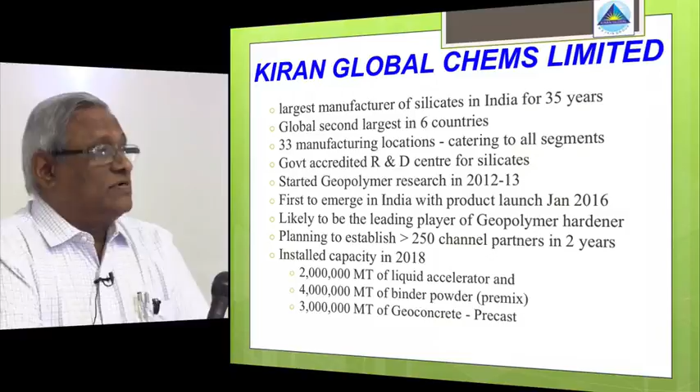We would like to establish more than 250 channel partners who will be working with us on the geopolymer products in the next 2 years. We would also like to establish a 2 million ton capacity of liquid accelerator, with 4 million tons of binder powder, and about 3 million tons of precast geoconcrete in the next 2 years.

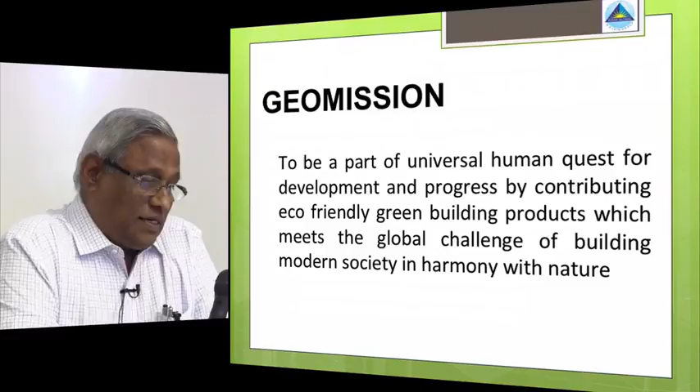This is part of our Geomission, where we would like to have earth-friendly materials to build green building products, and we would like to be present globally.

A brief about the manufacturing of silicate. There are 2 processes, which the gentleman from Walden told you yesterday: we do both fusion and dissolving process, and also the direct hydrothermal process. In the fusion process, we use sodium carbonate and silica sand, and in the hydrothermal process we use sodium hydroxide and quartz.

We are also making a lot of blended grades of silicates for accelerators, and currently a new product we have evolved is an accelerator using feldspar. I've got some samples which I'll show you later.

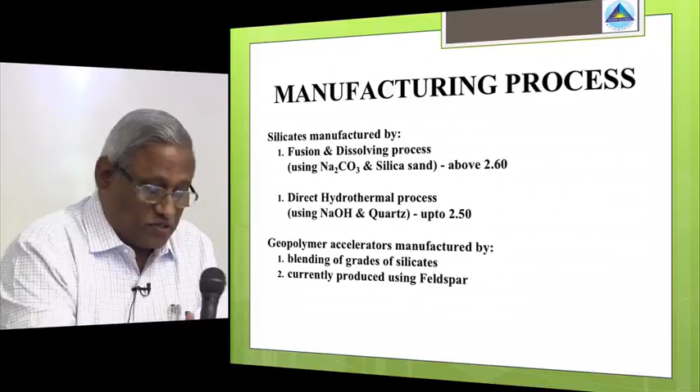As I told you, between the last conference and now, I'm going to share 12 months of my experience in the areas of accelerator development, application of geopolymer in different areas, and our observations and recommendations. I think this will be very useful to most of you here.

As part of the presentation, we have the milestones from last year and the facilities we created to cater to the market, our future roadmap, the business plan, and what this channel partners program is all about. I think this is an innovative idea which we want to take up much faster into the world.

I'll give you some recommendations which I think will be useful to most of us, and how we would like to be present globally. What are the milestones? In September of last year, we installed an exclusive accelerator facility to manufacture Geopolymer accelerator.

Between September and now, we have 33 plants making sodium silicate, but we have one exclusive facility for making accelerator. We have set up 3 more plants in the last 7 months.

Last December, Chennai and Tamil Nadu experienced one of the worst floods in the last 80 years. So what we did in the city of Chennai is take a vehicle with our geopolymer concrete and went all over the streets filling up potholes as our part of supporting the government.

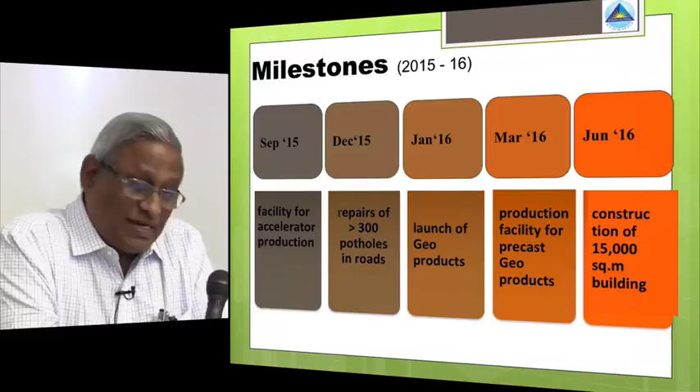It was a 15,000 square meter building, our own factory constructed for manufacturing precipitated silica. We didn't do the structural elements, which were done earlier. All non-structural elements, the roads and everything, were done using geopolymer, and I think it was a very great experience for us.

These are some of the projects we have been executing, and we have already executed more than 65,000 square meters of geopolymer paver blocks.

The first one we started is a quarters for our laborers to stay on a 1,200 square meter area, and this is how we started our first work.

As I told you earlier, the 20,000 square meter precipitated silica factory has an underground water storage tank of 1 million liters, and we constructed the effluent treatment plant and a chimney 16 meters tall, all from geopolymer concrete, with all non-structural elements, as the structural elements were finished earlier. I was going to show the photograph also.

Another one is we have made the coastal armor, the tetrapods. We made samples and got them approved, and we are going to execute a big project in the Maldives, supplying about 6,000 tons of geopolymer precast tetrapods every month.

At present, we are constructing a cottage, a villa, for a group of companies, about 60 cottages all in precast concrete, running to about 85,000 square feet, or roughly 9,000 square meters, and some photographs.

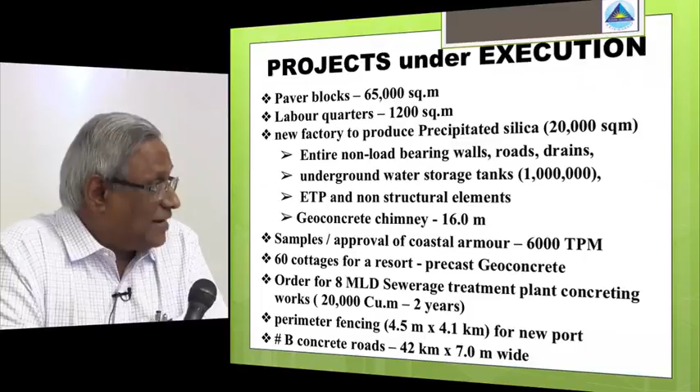The government of Telangana, the new state formed from Andhra Pradesh, now requires all B-class roads to be laid in concrete. So we got hold of the ministry, laid a sample, and now we have got the first contract for laying 42 kilometers of B-class roads, 7 meters wide.

This is the factory building of ours, which will be producing precipitated silica from the first week of September, about 50 tons per day. This is nearing completion.

Other than all the structural members, it's a 20-meter tall structure, and all walls, the roads, and the flooring are all done by geopolymer concrete.

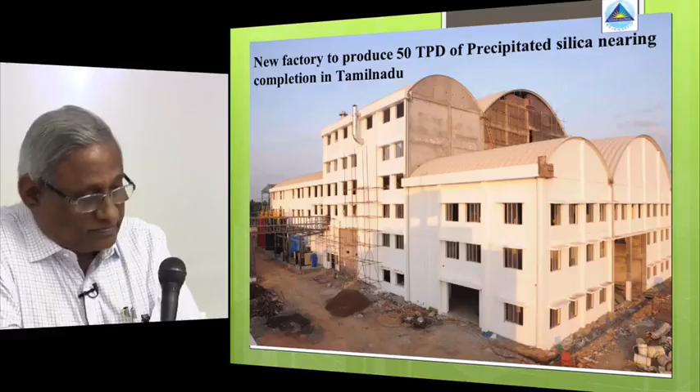You see, these are the top chimney blocks that we have made in Geopolymer concrete, and the total chimney was about 16 meters. We got a lot of chimney elements made now of different sizes. We made chimneys of 1.25 meters in diameter.

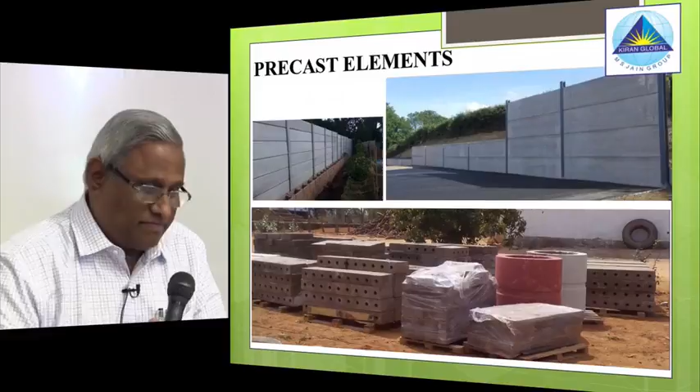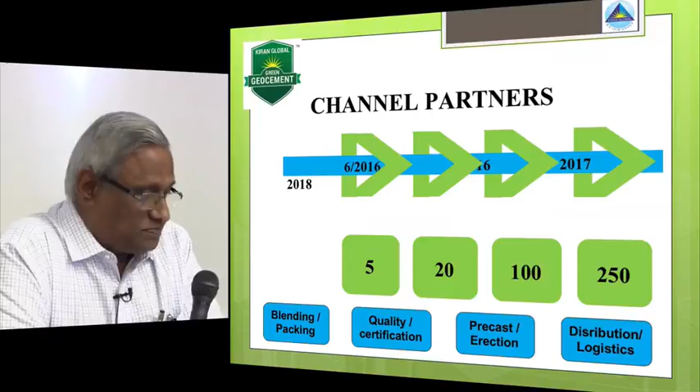We are creating an exclusive facility in a port, and almost 70% of the work is over. The construction and erection is going on. Maybe from the month of September or October, we'll start production in that unit, which will supply this to the government of Maldives. The contract is for about 5 years.

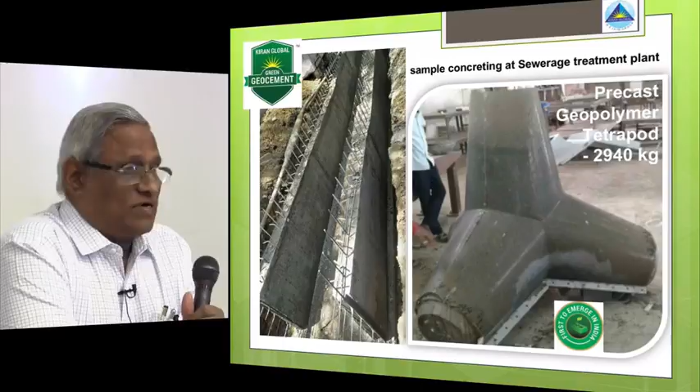We need to cast a total of about 3,000 rafters for this project, and this is a very prestigious product. Even the companies making Portland cement precast have failed at this.

We have a 5-inch section and a 2.5-inch section. The Portland cement could not withstand it, and of course we took a lot of trials. The important part of this is that the whole design of the molds was done by us.

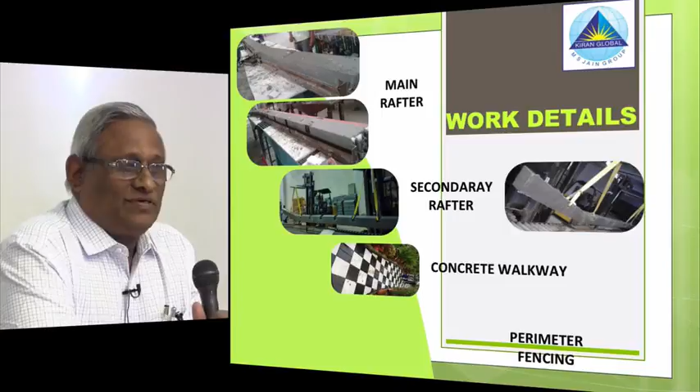It's a walkway, a sample walkway we created using geopolymer concrete. I'm showing this because it has two colors—black and white—which are the toughest colors to make in concrete. You can make any color, but black and white are the most difficult, and we did it with fair amount of success using geopolymer concrete.

This is a small 20-meter sample we made, and we need a lot of walkways for this project. The architect wanted black and white, and it was a challenge that we addressed.

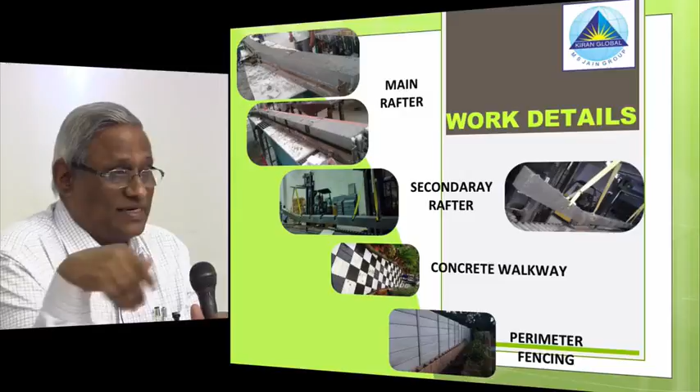This was another type of fencing for the project, with a lot of planter boxes where you can create greenery. The cottages have a built-in big lake, a golf course, and a lot of facilities—it's quite a big cottage project.

I'm just sharing some of these things, and as I told you, we have our own well-equipped mold making workshop, which is essential if you want to do precast materials.

We have made molds from PVC and rubber for small components, which we outsource. We give a master mold and get it outsourced from the market, while we develop our own steel molds.

These steel molds are ceramic coated. We also did a Teflon coating, which works very well, but we are not able to recycle it for a long time. We also tried an epoxy coating, which also worked well, but again had the problem of recycling. The ceramic coating lasts longer, so we established a ceramic coating setup.

We have an excellent ceramic coating setup because we need to do a lot of molds. It's a plasma coating. All our products are set and cured at ambient temperature—we have not done any increased curing at all.

We have a plant for manufacturing pre-mixed powder binders at various mixed ratios of fly ash and GGBS. The issue is two things: if there are more fines, it consumes more accelerator, and if there is more moisture, it becomes very difficult to control. These are the two things we need to address when pre-packing the powders.

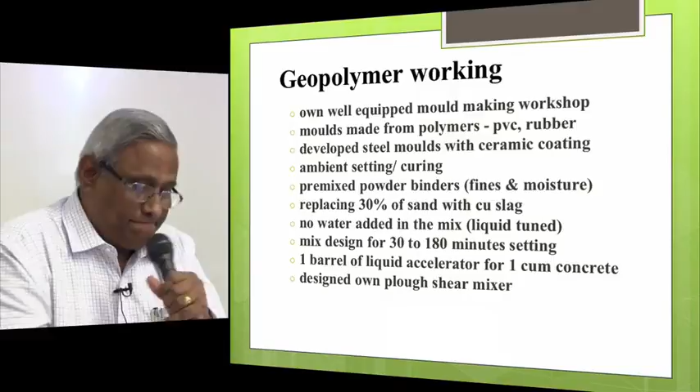In our plants that we would like to establish - 2 plants already commissioned, as I already told you - each has a capacity of 50,000 tons per annum, roughly about 150 tons a day, with an investment of 200 million Indian rupees. These plants grind the blast furnace slag, blend it, and also do the packing.

We are not ready for packing this material as a product for the market because of issues with the cement lobby. So we are now giving it to our channel partners instead.

For the accelerator, we have commissioned 3 plants, and now we have a capacity of 20,000 tons per annum. This is excluding our silicate plant.

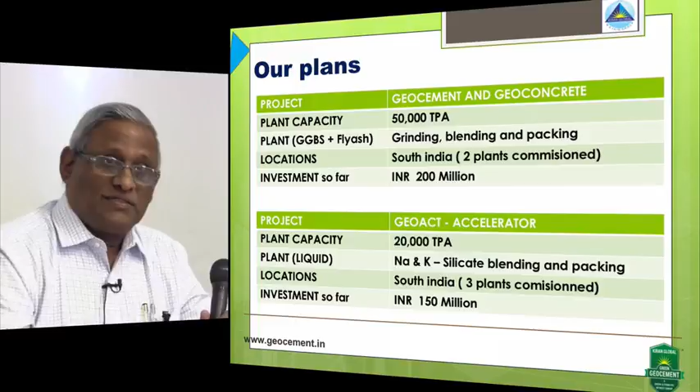The silicate has got nothing to do with this - it's totally an accelerator where we have a blending facility and an exclusive manufacturing facility for making both sodium and potassium. We also have a packing facility where we can pack it in jerry cans or in barrels.

This is the second largest steel plant in India, called the Vizag Steel Plant. In the last 5 months since our launch, they are after us and we are after them.

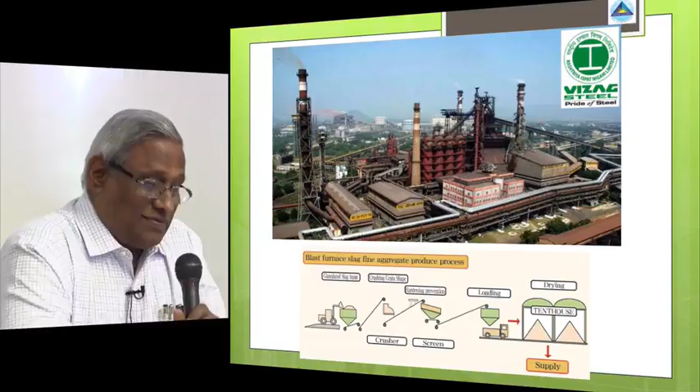On the 28th of June, about 10 days before, we got a raw material linkage proposal - they've given us 15,000 tons per month of fly ash and 15,000 tons of blast furnace slag, and we are going to create a grinding facility inside the steel plant. They are giving us an exclusive place so we save on taxes for transportation.

We will be setting up our first 400,000 tons binder plant in Vizag in exactly 4 months from now. This is the first government support that we got - it's a government-owned steel plant. Now we have more offers coming from other companies, and this is one we got very recently.

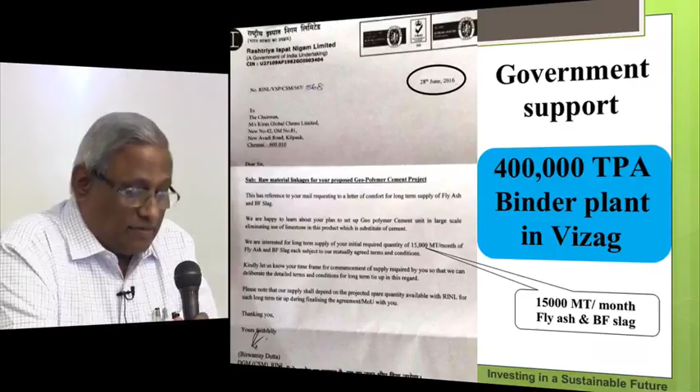These are the products we have on our shelf, ready from our research. One is Geocement, a powder blend, and the other is the Accelerator, which is liquid. Then we have Geocrete normal, for general purpose concrete, and Geocrete super, which is a quick setting material.

Then we have one for wear resistance, called Tough, and Mortar, which has worked very well - we have trained over 30 masons to work with it, and they have in turn trained about another 100 people. It's a very big achievement using this Geopolymer mortar.

Our compound for fixing tiles has come out very well - we have a mortar joint of just 2 to 2.5 millimeter thickness. I'm going to tell you a case study a little later about what we did.

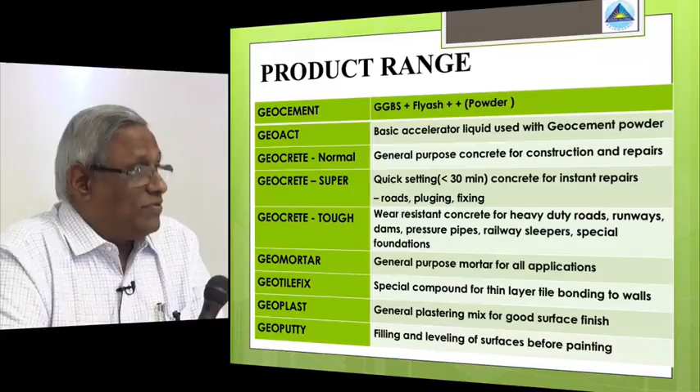We also have a plaster mortar, which gives a very good finish and works with your plastering machine too. Then we have a putty, which is used to fill up gaps and so on. So for the Geocement range, we want to have about 9 types of cements.

This is how we take competition with the Portland cement. The first one is the general purpose cement, which we would even prefer to undersell to compete with cement, and which in actual case it is not required, but it is possible.

A general purpose cement, and then we have an acid resistant grade where we use a mixture of sodium potassium, and then we have a temperature resistant cement where we use mostly potassium, and we have a chloride resistant cement, and then we have a ready mix concrete.

And how to make ready mix concrete and setting time, I'm going to tell you how we have done it very successfully. And then quick setting, we have made a lightweight block that floats in water, and we did a good project doing a panel. It's come out well.

Right now we are working on insulation material. We are doing insulating roof tiles with a channel partner who is an existing factory, where we have asked him to use Geopolymer in place of Portland cement, and he has successfully done it. It took a lot of trials, and it was not so easy. We had to fine tune, and correct some of the molds, and it has come out very well. He has just gone into production. Probably we will go into the market from next month onwards.

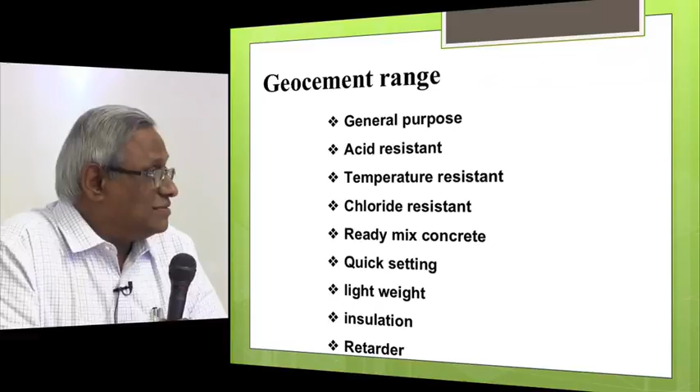And we have made some retarders. These are required for making the ready-mix concrete. These are other products we are now developing in our R&D.

We are having a waterproofing compound. We have a primer coat for all masonry surfaces. And then we have a heat resistant coating compound based on geopolymer. There are 3 doctors who are working full time on this, and we have a full-fledged laboratory to do this.

And then we have an acid-proof application which is just completed, and a chloride-resistant cement which is required for marine tetrapods and for the pipelines.

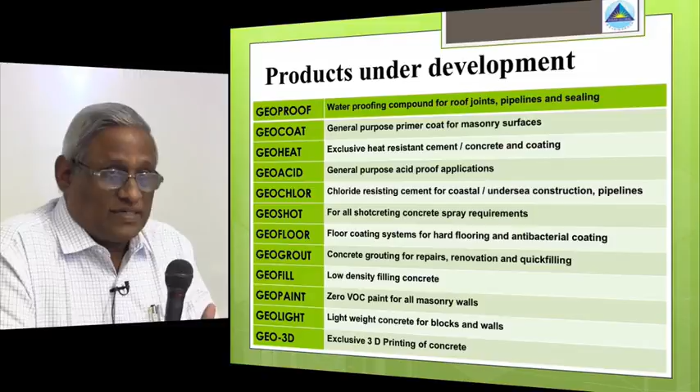For shotcreting, we are just making some trials. The first trials are good. Maybe we need to do more work on this, because basically we are a company that manufactures silicate grouts for underground tunnels. We have a silicate grout which is a backfill for your tunnel segments, and when you do the tunnel boring, this has to set in 20 seconds. So this is the material by which we started our work, and I think that's the starting point for us to get into the geocement business.

The geofill is a low density filling concrete for sunken areas, and then we are coming out with a silicate based paint which is prevalent in Europe and US but not in India, and lightweight concrete as I told you, and 3D printing.

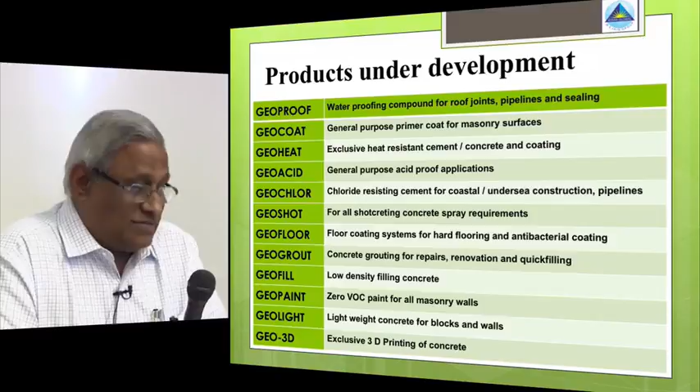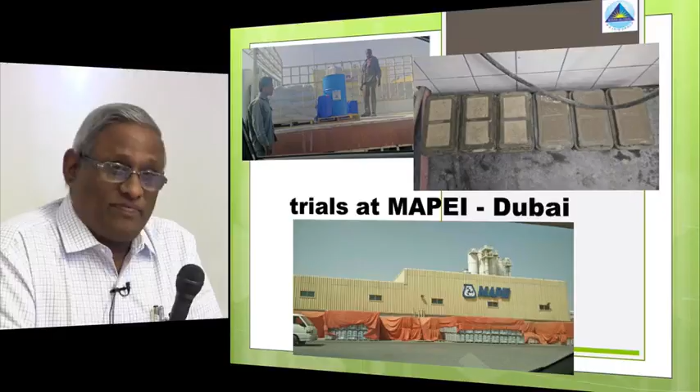So these are some trials that we conducted in Dubai. MAPEI, the leading company who manufactures a lot of additives, was willing to work with us, and we did a trial, and they found the geopolymer concrete. He said it's awesome, something great, I think. And they want to know how to package this, because if they sell geopolymer, their additive business will go down. So they need to find something in between. I think we are working out a methodology by which this product will be packaged.

Some case studies, I will tell you about 2 of them. I'll take case study number 2, where after the floods there was a house that was underwater for about 3/4 of a feet, about 9 inches. After the floods started receding, we filled up the house with sand and geopolymer powder, dry mix, for about 2 feet. We thought we'd need a big compactor, but it just got compacted very easily, and 2 feet we filled up.

We compromised on our ceiling height. The present ceiling height was about 10 feet; we compromised and took it to 8 feet, which is relevant in most countries. 2 feet of filling up was done, then we laid the geopolymer concrete flooring, about 3 inches of flooring.

This time we used none of our factory people or trained masons. We took regular market workers with the regular concrete mixer in the regular way, without telling them it was anything different. So when they started concreting, they first asked, 'Where are the cement bags?' When we started from the barrel instead, they refused.

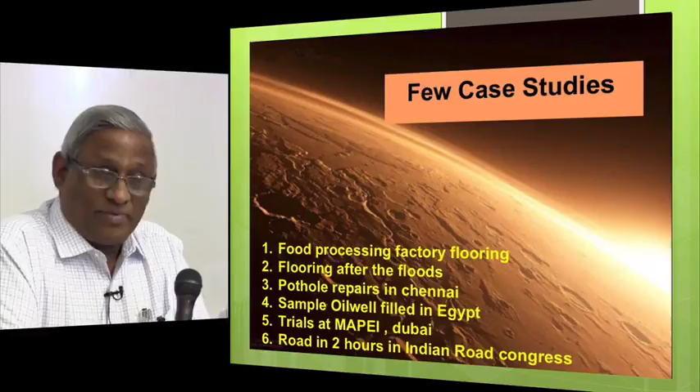They were not able to arrest it because the gas was coming out at 200 degrees centigrade, so it was very difficult. From the Egypt factory, we asked them to formulate our Geocement, and then we took it and a sample well was plugged and sealed very well.

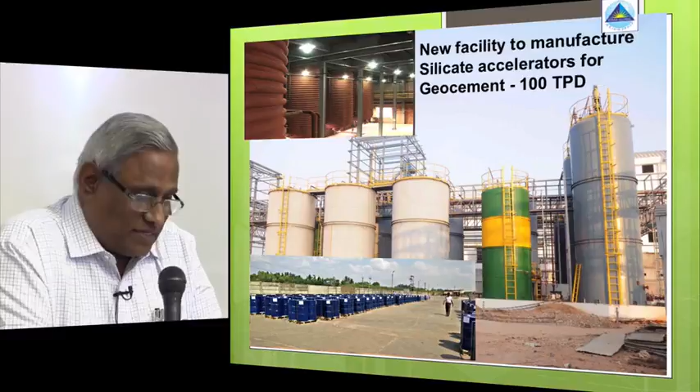Now let me give you some observations and recommendations. The important thing is choosing the right type of accelerator for the right job - this is very important, and I'll tell you how to choose the accelerator in the next slide. Equally important is the ratio of the powder mix of your fly ash and GGBS. Then your mix design depends mostly on the setting time and your strength requirements.

Cracks will come - cracks are not uncommon to concrete, but how you address them is more important. Sometimes you have more fines and it develops cracks, and if it is under-cured - I know there is no traditional curing, but there is still a curing process for geopolymer concrete, it cures within - if you demold it too early, it develops cracks.

Another important problem is efflorescence. It happens when you use a higher alkali content. You get white spots or other deposits coming out, and you'll notice this when you put the product in water - you measure the pH to know how much additional alkali your product has consumed. Actually, it is possible to optimize and work with a very low amount of silicate activator. When I first attended the conference in 2013, they said they used to have 22% alkali; now we work with 5%. There are also dark spots in concrete.

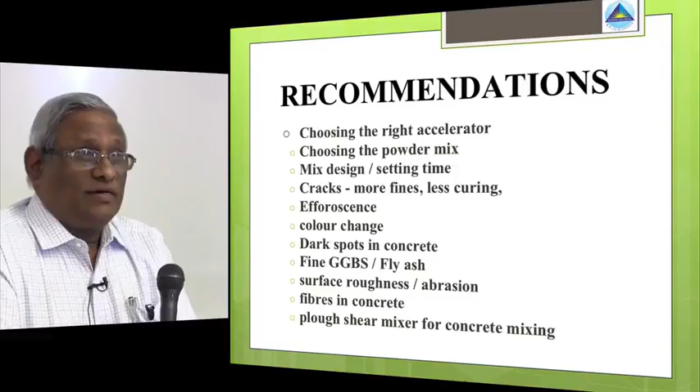And of course, fibers in concrete - I think the best fibers are steel fibers. We have not been successful with glass fibers. We've had some success with polyester fibers, and polypropylene fibers haven't given very good results either. But steel fibers have given very good results for us. Maybe the reason is that the alkali binds it very strongly with the steel. Regarding the shear mixer I already told you about - if you want to build one or order one, ask me, and I will give you a design free of cost.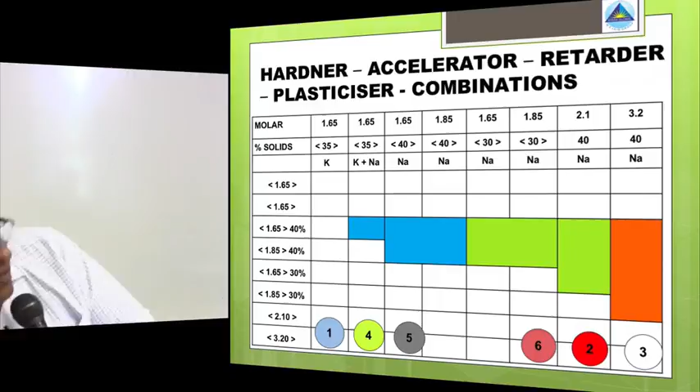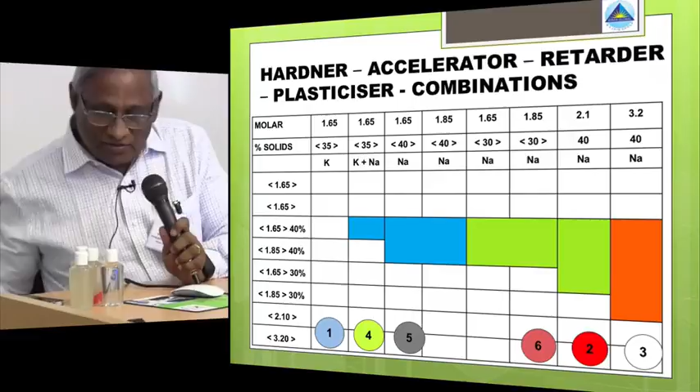This is something very important - the type of accelerators and retarders we've made, using different molar ratios. I have samples here which I'm going to show you, made from molar ratios of 1.65 to 3.2. Many people will wonder what the 3.2 will do, because the recommended ratios are 1.65 to 2.1.

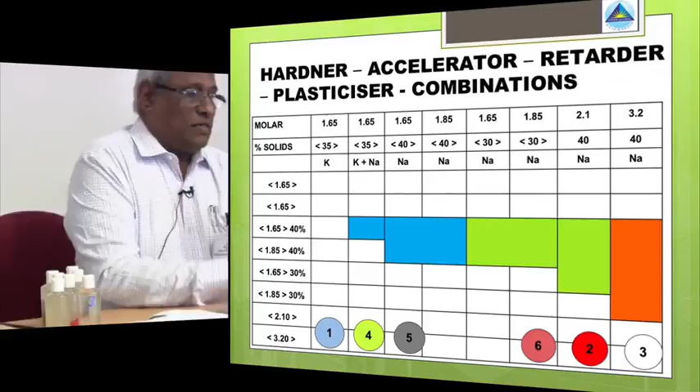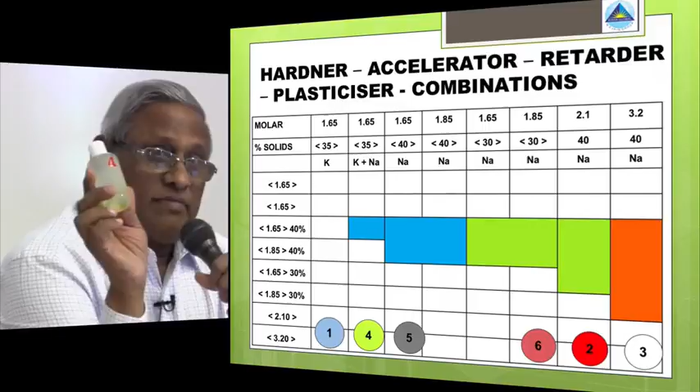The one I have here is the 1.65 ratio with 35% solid content. This is actually a potassium-based sample, and this is a combination of potassium and sodium, in a ratio of 1/3 to 2/3.

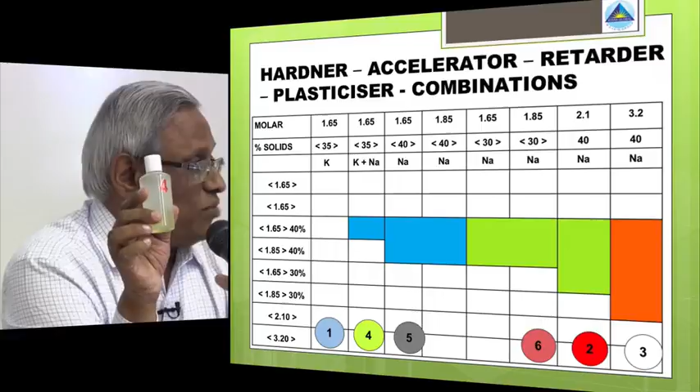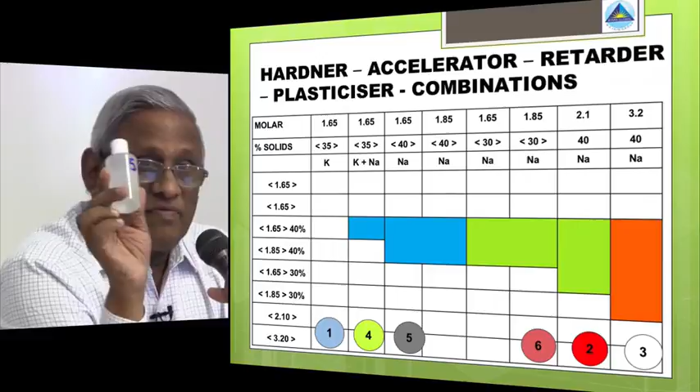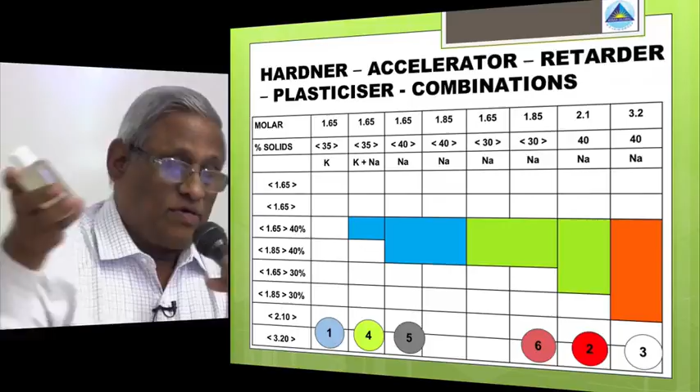This is also a 1.65 molar ratio with solids of 35%. And this is sodium, with 40% solid content, again 1.65 molar ratio. I'll tell you what the colors indicate. Then I have this one, a 1.85 molar ratio with 30% solids, and this one is a 2.1 molar ratio with 40% solids.

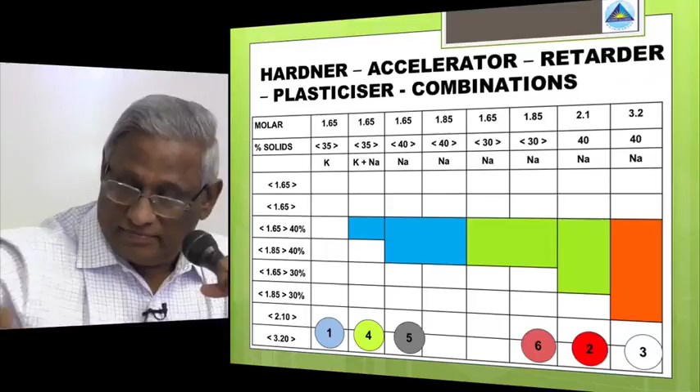And this one is a 3.2 molar ratio with 40% solids. I told you we've also made something with feldspar, and the process has been different than what we make from normal silicate.

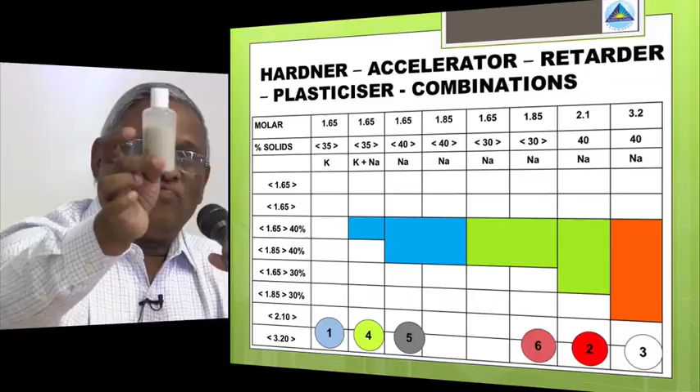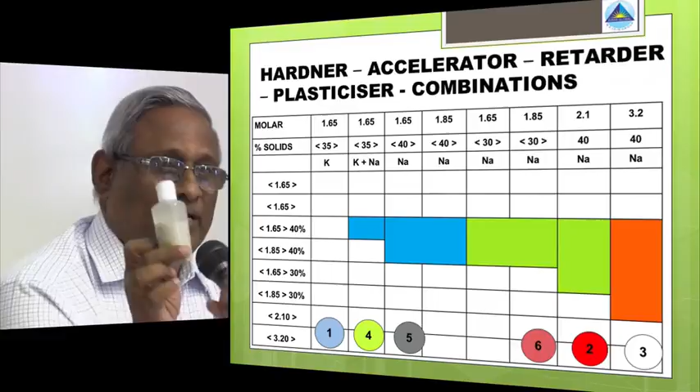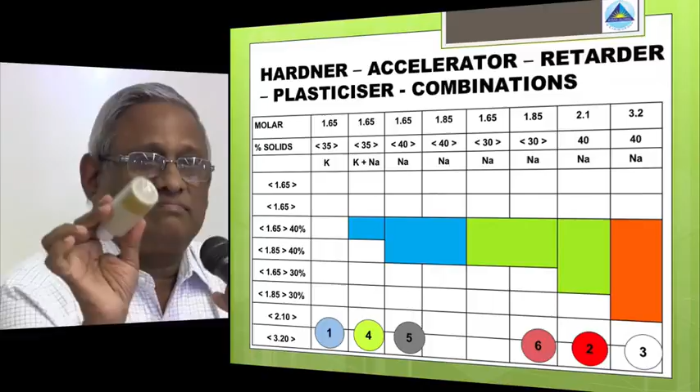This one is made using feldspar. It has formed a sediment, and this sediment is required - if you filter it out, it won't work. This sediment is very, very important. This is one of our latest tests, and it's going to be fine. This is going to revolutionize the market, because it's the most cost-effective solution.

Right now we've made some color charts where, in the 40% samples, we put a blue color, which means you can add water there - you can dilute it for flowability of the concrete. We've made dry mix concretes, self-curing concretes, self-setting concretes, and pumpable concrete. The one with the green color, you can use it directly - no need to add water. They are 30% solutions, working at an ambient temperature of 25 to 30 degrees, and you don't have to add water at all.

The reason we've now prepared a product where we don't have to add water is that, normally in India, concrete mixing is mason-controlled - and we do not know how much water the masons mix in, even for curing, or what quality of water they use. We wanted to bring the art of making concrete from mason-controlled to mason-less, so it should be an engineered concrete. That's why I wanted to prepare the solution so there's no ambiguity in mixing - you straight away mix and start using it. That's also why we are going to give powder packs of different combinations.

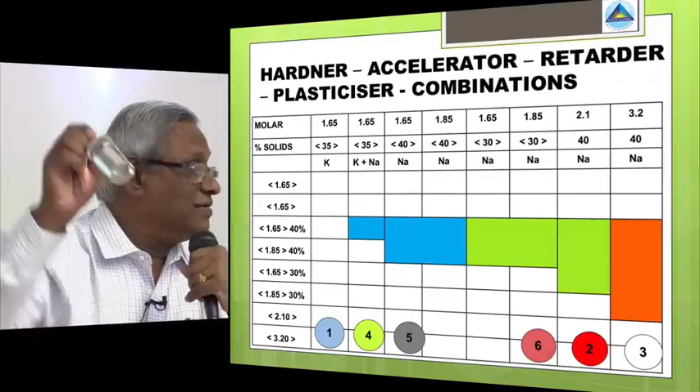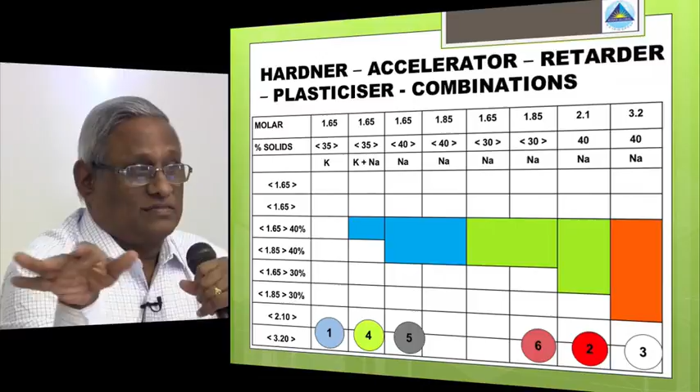This is used as an excellent retarder of concrete. Only thing is the dosing is very important. If it is used effectively, it is an excellent retarder. If you want to extend your setting time, don't use anything else. In our experience, we have done ready-mix concreting keeping it for 3 hours, and it works well.

As part of our geopolymer activity, we regularly conduct workshops in schools and colleges, and we have trained more than 250 students, because they are the future of tomorrow, and they will be asking for geopolymer concrete from day one. So there is a team of people who go and train and give workshops in colleges.

We have aligned with about 10 universities in India. We have a training center now where we train supervisors on how to do different types of mixes, mix design, mold making, precast, all those things. We also conducted an exclusive workshop for architects. Six architects took part, the top 6, and all top 6 are now giving us orders. This is one of the approaches we have taken, and we are able to establish marketing of our Geocement products.

Another very important slide is the ratios of fly ash and GGBS. It could be any of these ratios - 50-50, 60-40, 70-30, 100% GGBS, or 100% fly ash. Anything is possible. But the thing is, we have to use the right type of activator, and then determine what strength you need. If you add more fly ash, sometimes you get a lower strength, and if you add more GGBS, you get a higher strength and a quicker setting.

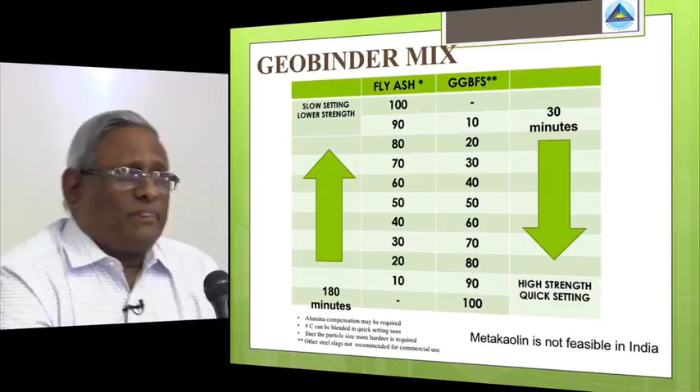Even Class C fly ash can be used for quick setting, but it should be used on site - it's not a commercial proposition, but if you want to do your own job, Class C you can use. And as I told you, the finer the particle size, the more hardener you need.

We prefer the blast furnace slag. The other slags we don't prefer because you don't get them regularly, and you can't sell them commercially. So blast furnace slag is one product where we can sell commercially. We don't use metakaolin because it's very expensive in India, and we cannot sell a good product at that cost. We can make one, but we cannot sell it because it's about 3 to 4 times more expensive.

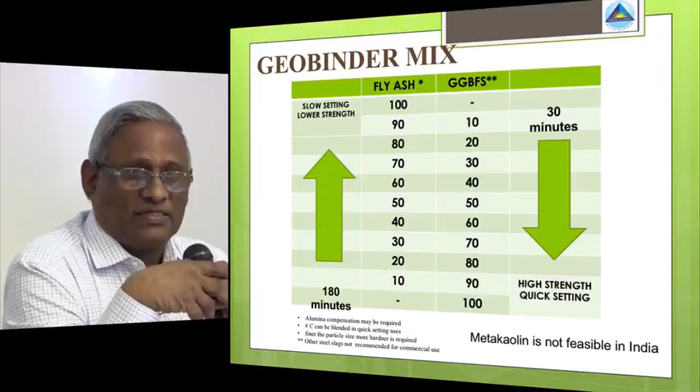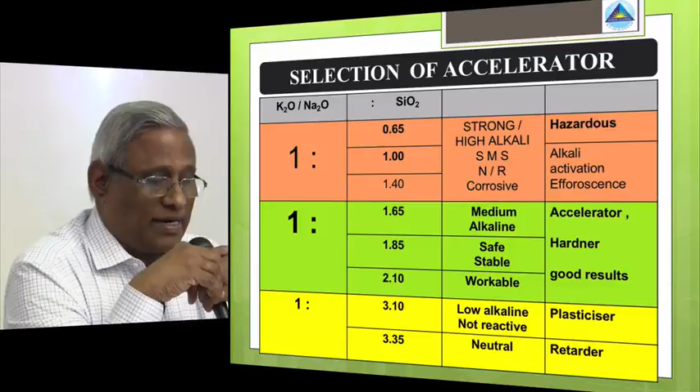This is the selection of accelerator. I think the professor has already told you the ratios yesterday. The ones on the green band, 1.65 to 2.1, are all favorable areas - they are stable, workable, and we call them medium alkaline. The other one we call strong alkali - they are hazardous and corrosive, so we don't use them. And the one at 3.1 or 3.3 ratio, we call low alkaline or neutral grade, which can be used as a retarder, and in some cases as a plasticizer.

I have made a small combination with feldspar there. The feldspar that we use is 65% silica, 17% alumina, 15% sodium and potassium, 2% iron, plus 1% of other materials. This is the type of feldspar that we have been using to make an accelerator.

This is a new one, and we are just filing the patent - we already hold 3 patents on different products.

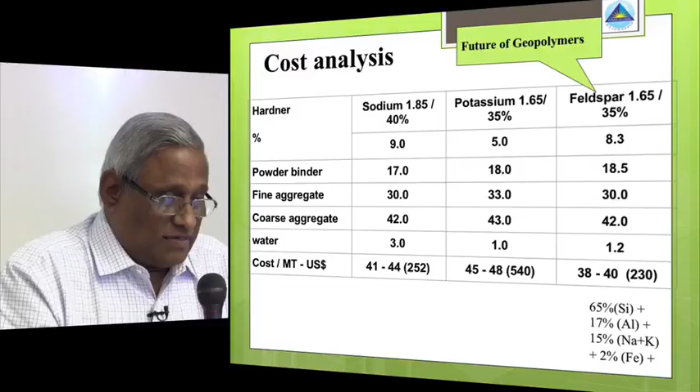The 4th one we are now filing, and I thought I would share about this new development to you. These are some plans that we have in 2016-17. We want to be present totally in India, in the MENA region, that's the Middle East and North Africa, and also in South Africa, because South Africa we will be present soon.

And we would like to address the market of Europe, UK, and the Far Eastern market through a distributor system. We will be establishing a plant in China and USA, and in Australia we will have another distributor. So the plant in USA is certain, and the plant in China is certain for us. So this is how we would like to take it up in the next 3 years.

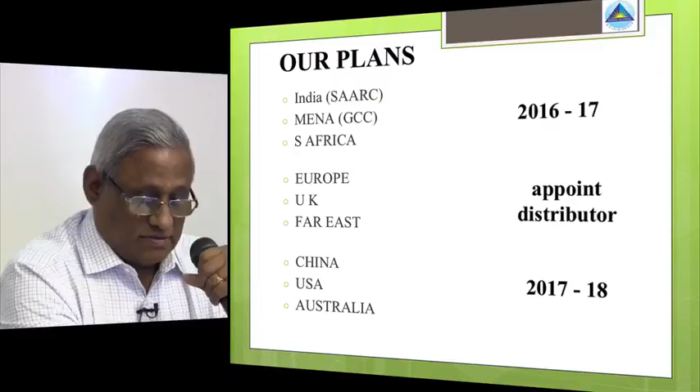And perhaps this last slide, where I would like to give you some food for thought, as I said yesterday.

Before that, does anybody here want samples of silicates for research and development? It's available free of cost, but the only problem is logistics. Last year I had sent 1 kg of sample to a person in Poland, where I spent 230 euros for transport.

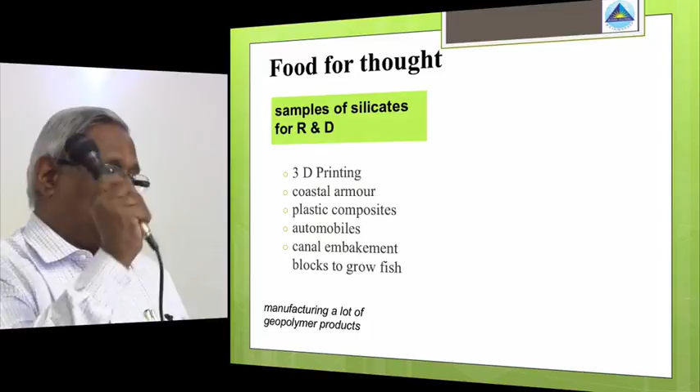So this is one of the problems, but I can give you free samples. We have samples from us in Dubai which are free of cost, and about 24 research institutions in India we supply the material free of cost. Anybody here, we can supply. The problem is if you can bear the logistics, we can give you the right ratios with all the technically perfect accelerator.

So now we've been talking yesterday about 3D printing, about coastal armor, and some plastic composites by other gentlemen, and uses of geopolymers in automobiles, as I was supposed to tell. And there was some article on canal embankments, where we want the fishes to grow. Geopolymer is an excellent material, where you have a design of blocks. A Korean has given me some thought and designs, which I thought I would share.

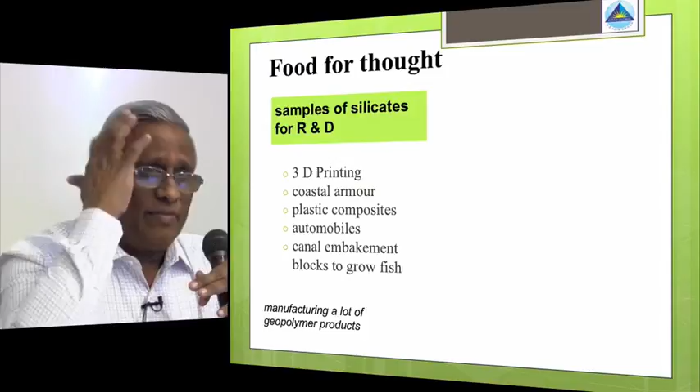Actually, I've been manufacturing a lot of geopolymer products in my mind, so I thought it's endless, and this is what I want to conclude with a note. Today is the world and time of IoT, Internet of Things, and connectivity. These 2 things are going to take the whole world in maybe the next 5 years, whether it is Tesla or whatever, these 2 are the critical words. How do we associate this with geopolymer?

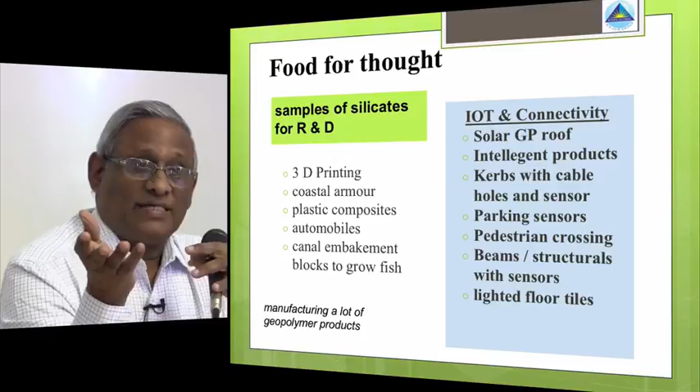Geopolymer is also, as Michael put it yesterday, something very disruptive, and it has an exponential growth. We have to align. Probably we can design some solar geopolymer panels where you can do away with the aluminum sections, where your solar modules can be integrated into your roof. We can make a lot of intelligent geopolymer products.

Some of them are, see, we have made some curbs with holes for running your cables, broadband cables, TV cables, where you don't have to cut the road to repair. You just remove the curb and then do the repair. And if I keep a sensor inside the curb, you know where the problem is, where there is water, where there is a puncture or whatever it is, you can address that very easily. So the curbs are designed to run cables.

It's a very big market, and I think it's something the world will welcome, because otherwise now we cut down on the pavement, cut down on the roads. And then parking sensors, you have blocks with sensors. So this is how you value add to your geopolymer. Don't compete with cement, value add yourself and make an individual branded product.

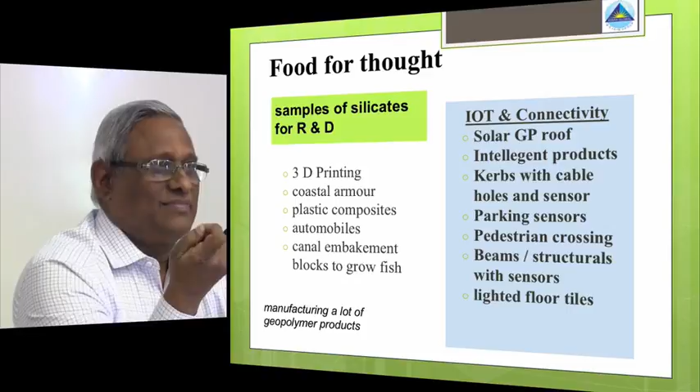It does sell. So in a pedestrian crossing, you have a geopolymer block. When 4 people stand, the lights turn green, and you walk. And then you put a sensor in your beams and study the deflection, study what is happening, what is the life cycle. The sensor is very, very cheap today. I think yesterday some of the presentations showed sensors in various aspects. I think it must be very good.

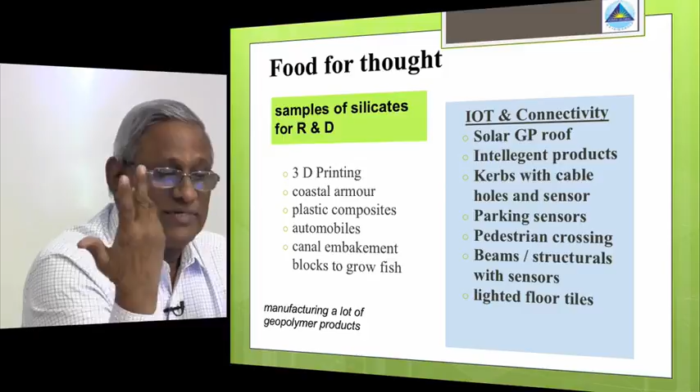And why not have LED lighted floor tiles in the walkways, in gardens, in pedestrian areas? Very big market. So these are some thoughts which I'm sharing with you. Maybe you have more, and then more to come.